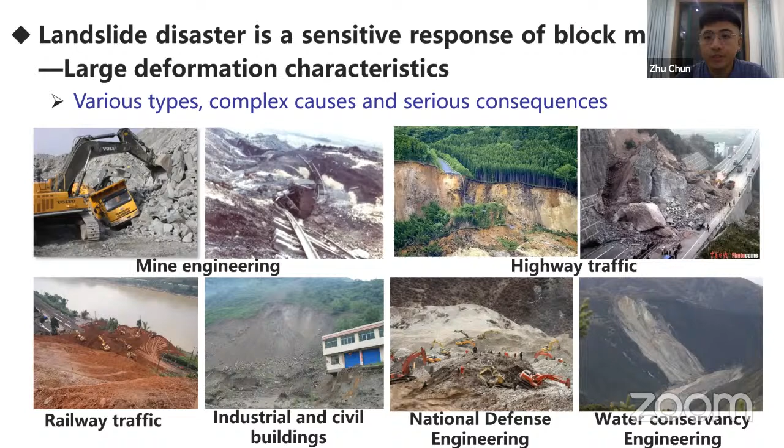In order to control landslide disasters, reinforcement methods such as lattice beams, anti-slide piles, and pre-stressed anchor cables were adopted in these projects, but many unfortunate landslides still occurred.

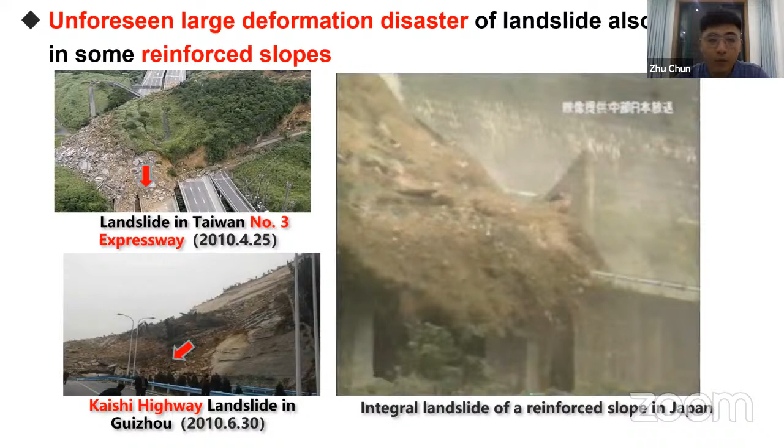According to the research, whether natural landslides or engineering-induced landslides, their essence is the same—they all experience a mechanical process in which geological bodies deform first and then undergo movement damage. We know the deformed body before a landslide can be described by Hooke's law, and the moving body can be described by Newton's second law. But how to describe the transformation from deformed body to moving body? This is a major scientific problem.

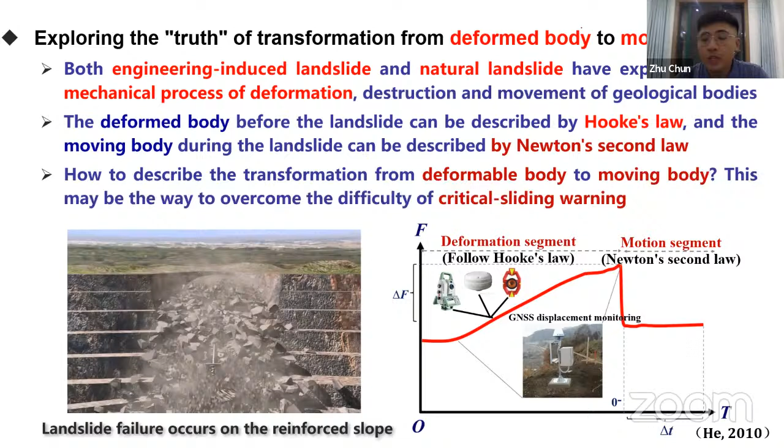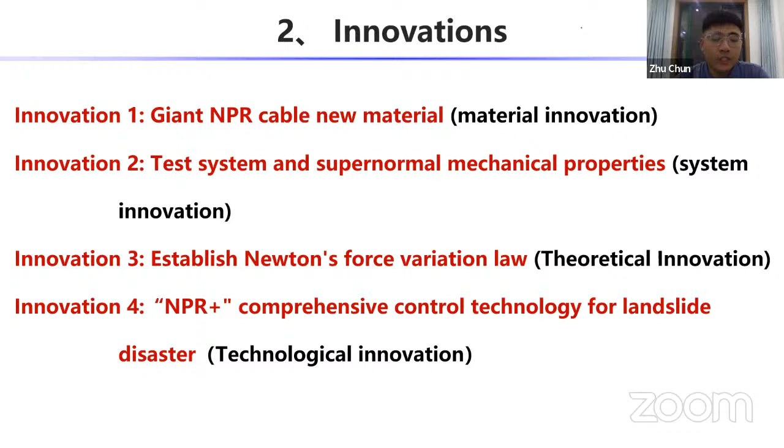Professor He believes this may be the way to overcome the difficulty of critical sliding warning. In order to solve the above scientific and technical problems, we have carried out extensive research, and the following four innovation points have been obtained.

Innovation 1, material innovation. A new material, the giant NPR (negative Poisson ratio) cable, is developed. Through the combination of conventional material and the NPR constant resistance device, the NPR effect of the material is realized. The material used in traditional slope reinforcement is generally damaged by large deformation, such as cable breaking and lattice beam shearing, which eventually leads to overall instability of the slope.

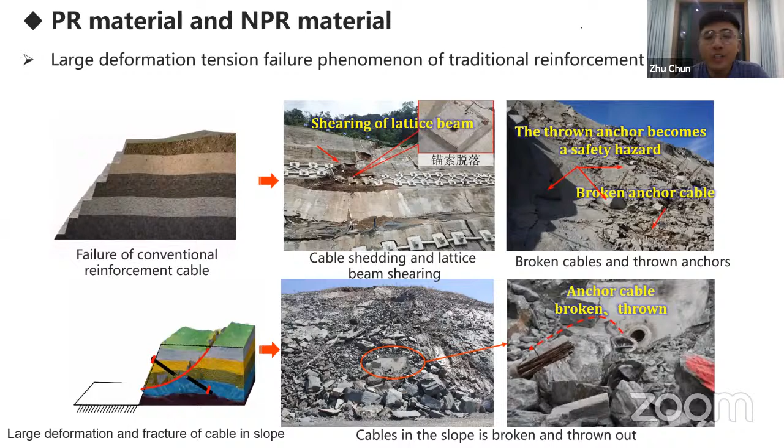The reason for this phenomenon is that the currently used reinforcement material is a small deformation material, which cannot bear large deformation and becomes locally necked and broken under tension—this is a kind of Poisson effect material. The solution is to develop a new material with constant resistance and large deformation, which has the mechanical property of thickening when stretched.

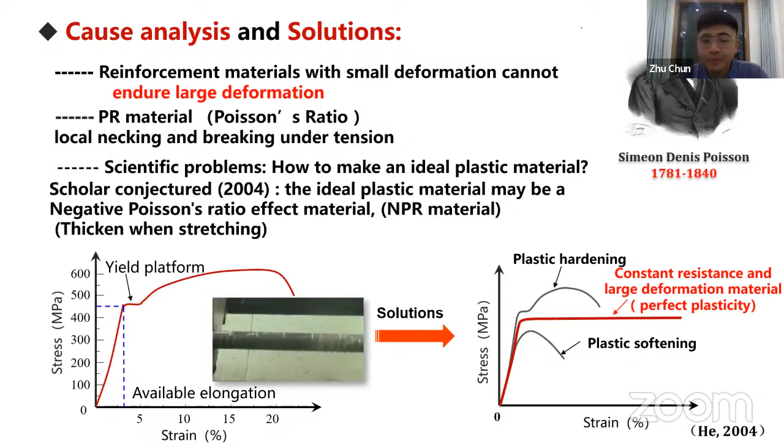Based on the concept of NPR structure proposed by Professor He in 2006, a new type of NPR structure was designed and developed, which can produce volume expansion when under tension. On this basis, the relevant mechanical models and constitutive relations are established.

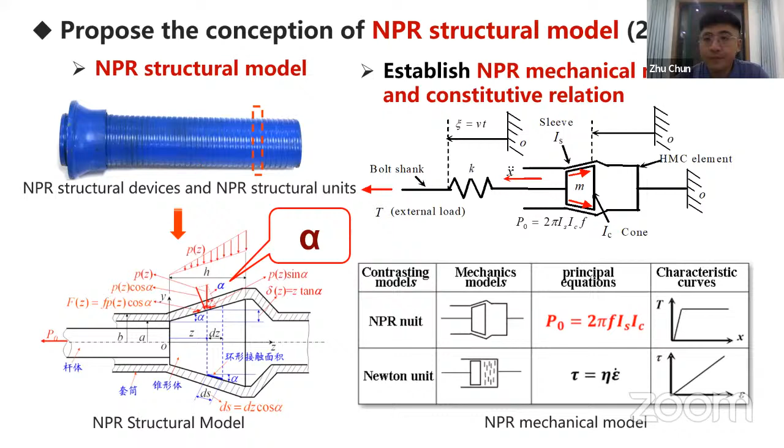The constant resistance design formula was deduced, and it was found that the constant resistance value of the NPR cable only depends on the elastic parameter of the constant resistance casing and the geometrical parameter of the constant resistance body, and does not depend on the external loading.

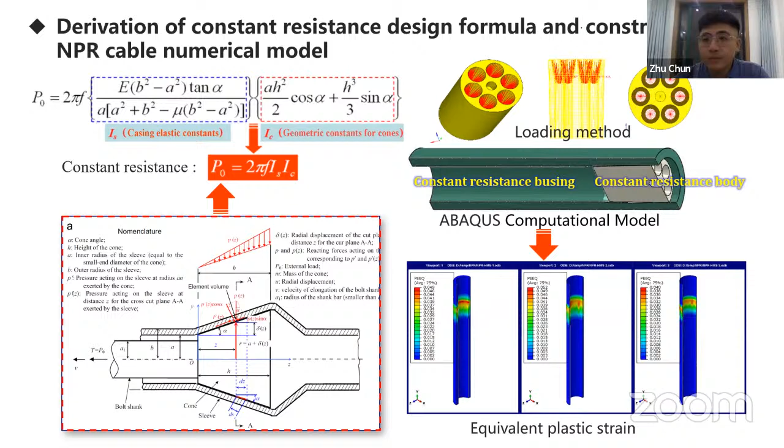The large deformation numerical calculation model and the mechanical analysis method of the NPR were constructed. The mechanical behaviors under static tension are explored in depth. In order to meet the needs of different landslide projects, a series of NPR cable products with different constant resistance specifications have been developed, suitable for small, medium, and large landslide engineering needs.

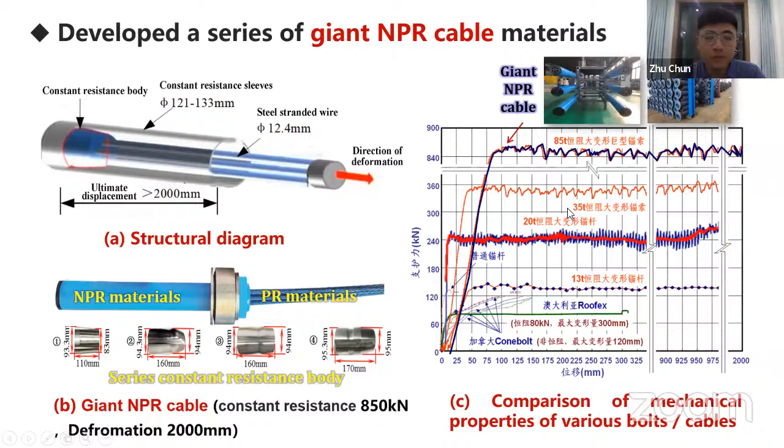Innovation 2, system innovation. The testing system and experiment method for the mechanical properties of the giant NPR cable were developed, through which the supernormal mechanical properties of the giant NPR cable material, with high constant resistance and large deformation, have been verified.

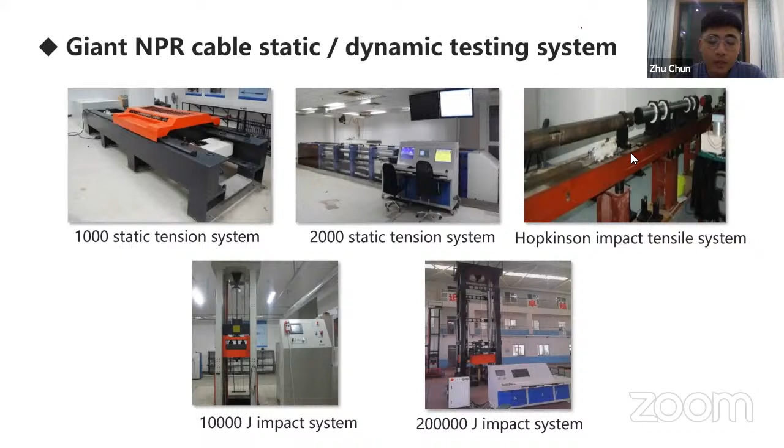In order to test the supernormal mechanical properties of the giant NPR cable, a series of mechanical test systems were invented, such as the 100-ton and 200-ton static tension test systems, the drop hammer impact test system, and the Hopkinson impact tension test system.

After testing, the new material of giant NPR cable shows four remarkable supernormal mechanical properties. The first is the NPR effect. Experiments have shown that the expansion of the giant NPR cable before and after tension can reach 3 to 4 millimeters, which has an obvious negative Poisson ratio effect.

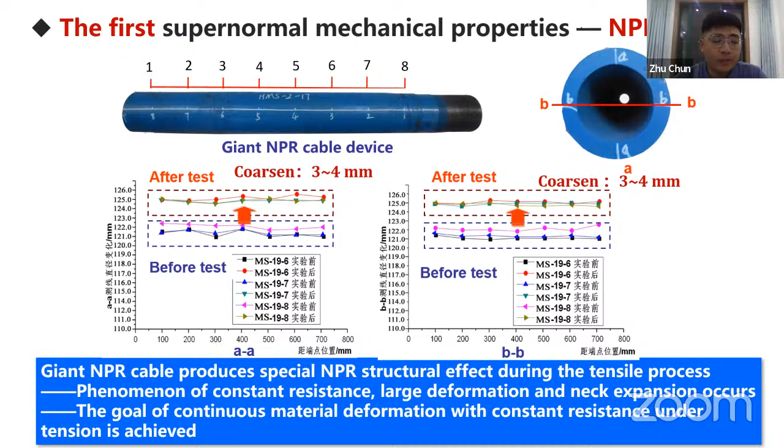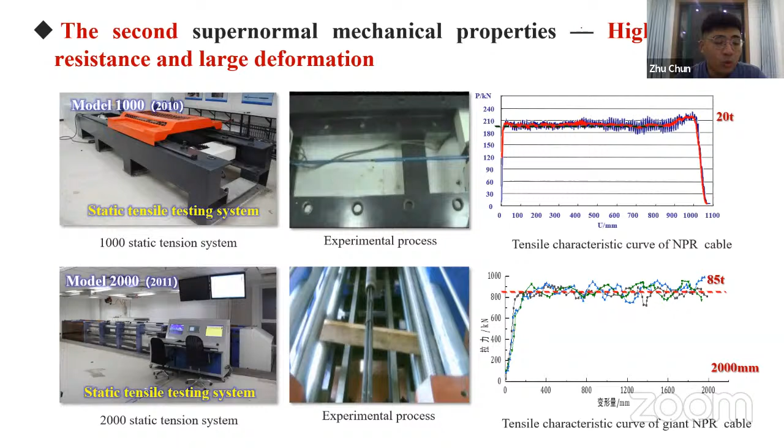The second supernormal mechanical property is high constant resistance and large deformation. After testing, the product has the mechanical properties of high constant resistance and meter-level large deformation. The constant resistance value is about 850 kilonewtons, and the maximum deformation can reach 2000 millimeters.

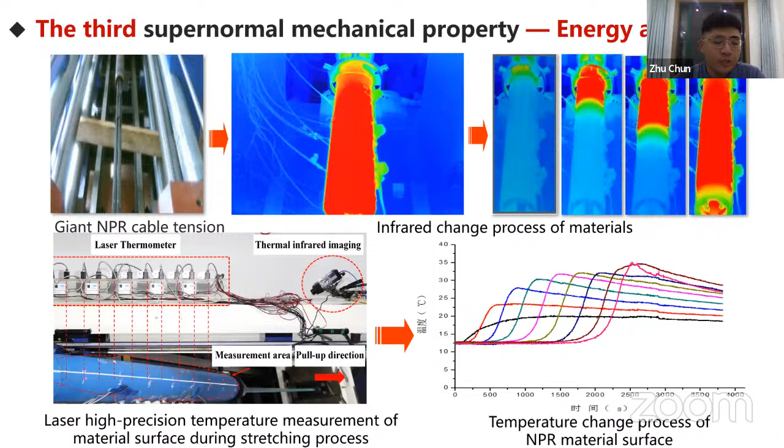The third supernormal mechanical property is energy absorption. Through infrared camera and laser temperature measurement equipment, the heating effect of the giant NPR cable during the static tension process was obtained, and its energy absorption mechanism was revealed.

The fourth supernormal mechanical property: under impact load, the giant NPR cable can bear multiple impacts without breaking.

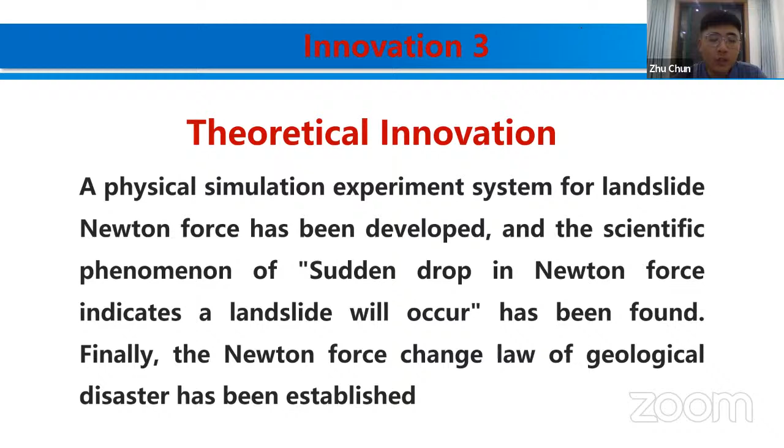Innovation 3, theoretical innovation. A physical simulation experiment system for landslide Newton force has been developed, and the scientific phenomenon of a sudden drop in Newton force indicating that a landslide will occur has been found. Finally, the Newton force change law of geological disaster has been established.

Before scientifically predicting landslides, we should further find the necessary and sufficient conditions for landslide occurrence. Since 1994, Professor He has led our group to research this issue, and a method for measuring the Newton force on the potential slide surface was proposed.

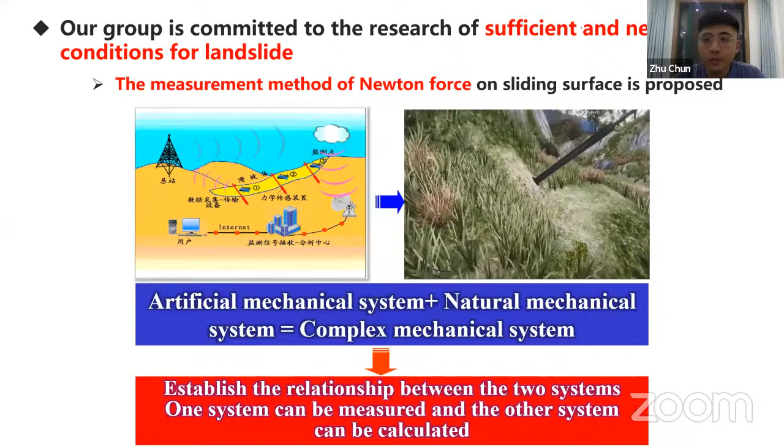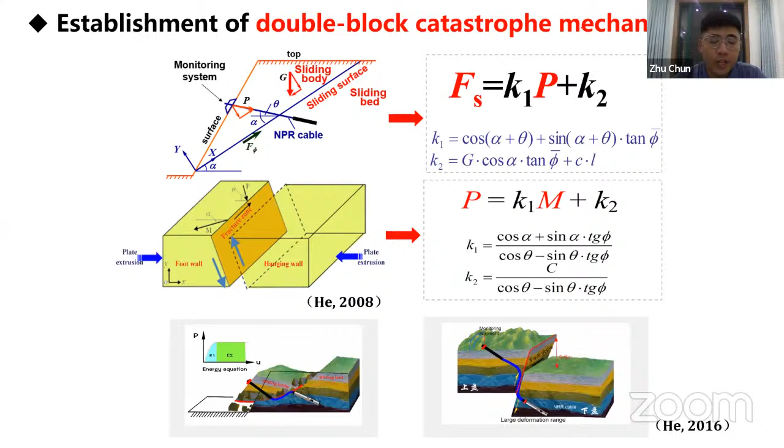Then the double block catastrophe mechanics model was established. The indoor physical simulation experiment system for monitoring Newton force is developed. Through massive experiments, the scientific phenomenon of a sudden drop in Newton force indicating that a landslide will occur is discovered, and it is verified in landslide similarity ratio physical model experiments.

Newton's force change law was established, which clarifies the rock mechanics interpretation during the transition from Hooke's deformation law to Newton's motion law, and reveals the core problem that the catastrophic time is proportional to the mass of the geological body and the catastrophe displacement, and inversely proportional to the Newton force.

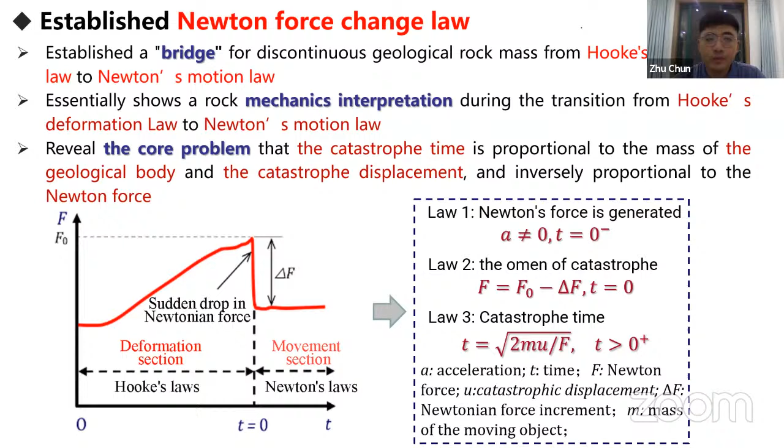Technological innovation: the integrated technology of landslide whole process monitoring and critical sliding early warning based on giant NPR cable has been developed, and the problem of integration of landslide large deformation disaster reinforcement monitoring and early warning has been solved.

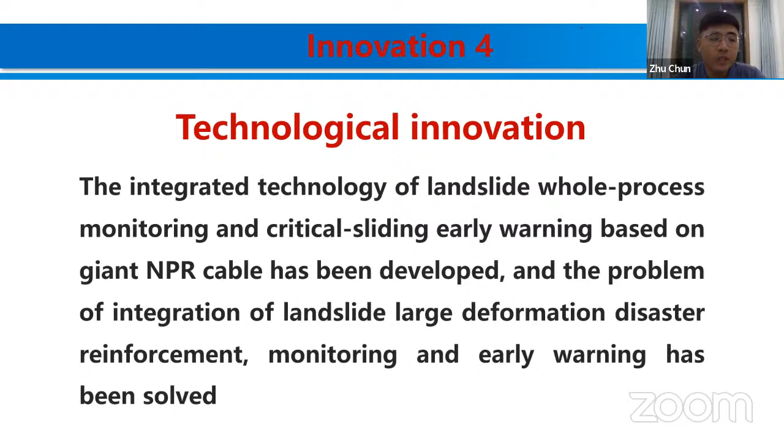Based on the above basis and the new NPR material, a Newton force monitoring and early warning hardware system for landslide disaster has been developed, including giant NPR cable force measurement system, intelligent sensor acquisition system, integrated protection system, solar power supply system, and

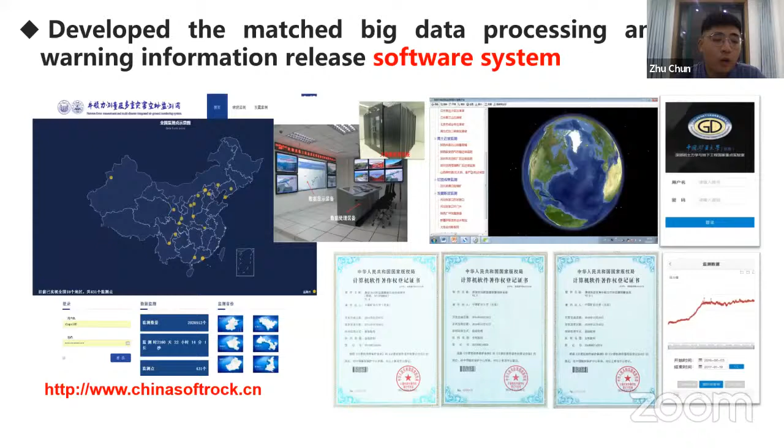big data transmission system. The matched software platform for big data processing and early warning information release has been developed, and the software copyright has been obtained.

The Newton force monitoring and early warning criteria and the model for landslide disaster have been established through the analysis of a large number of numerical simulations, physical model experiments, and field measured curves. Early warning modes of stability, potential instability, cracks, and slips are proposed according to the changing features of Newton force with time. Based on the above four modes, corresponding computer intelligent recognition criteria of blue early warning, yellow early warning, orange early warning, and red early warning are developed respectively.

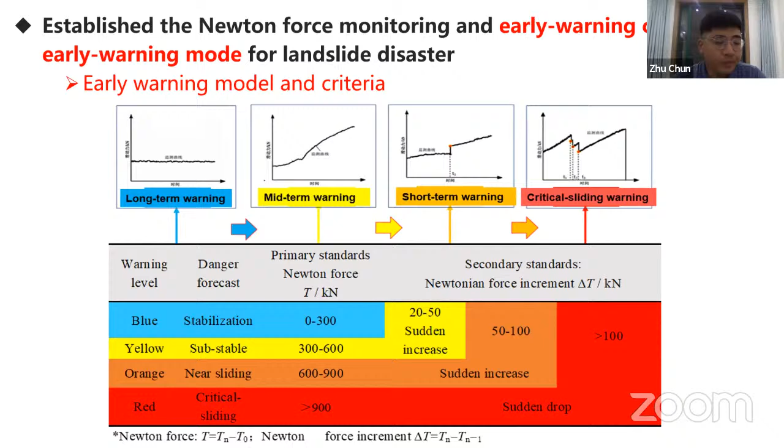By using the above equipment system, the phenomenon of sudden drop in Newton force indicating a landslide will occur was monitored on site 16 times, which verified the scientific validity of the Newton force change law.

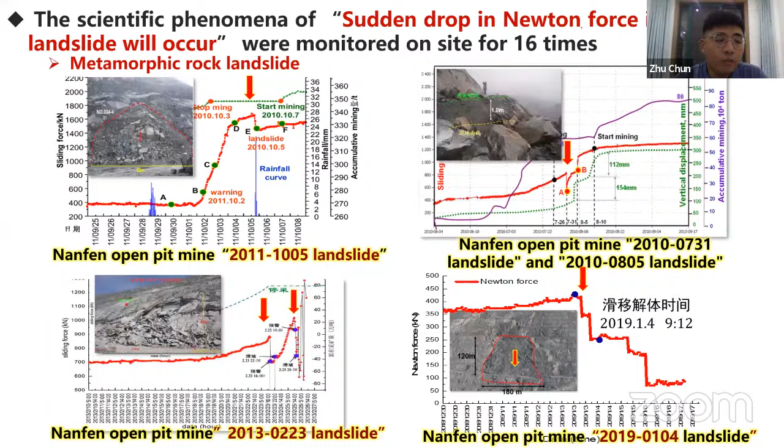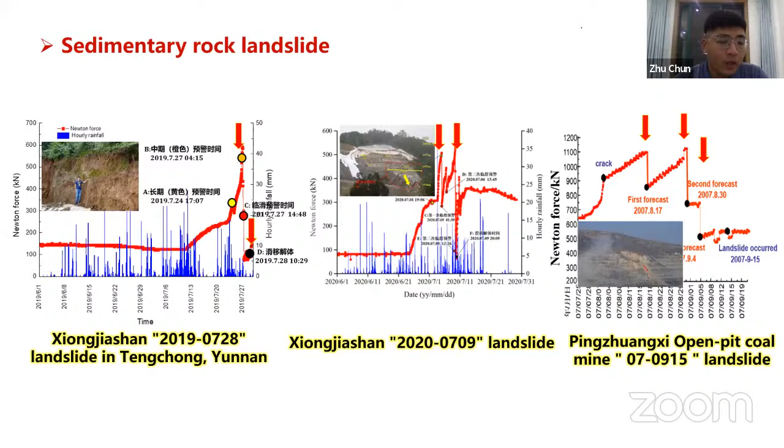Through analysis of the above cases, a total of 16 landslide disasters occurred in the past 10 years, and this system issued a critical sliding warning 3.5 to 20 hours in advance each time, effectively improving the precision and accuracy of critical sliding prediction for landslide disaster.

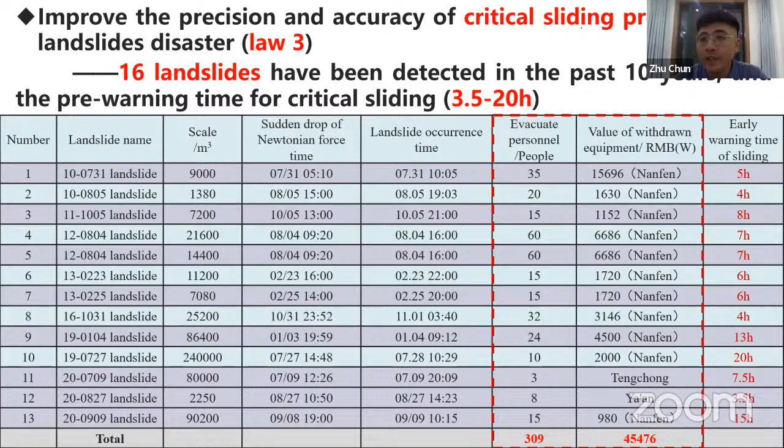Compared with other similar technologies in the world, it is found that the giant NPR cable material is superior to existing large deformation materials in various indicators, such as constant resistance value, deformation value, and energy absorption.

In terms of landslide disaster monitoring technology, the Newton force monitoring parameter, which is a sufficient and necessary condition for landslide occurrence, can be used. In addition to monitoring and early warning, it can also reinforce and protect the slope, and it can issue a critical sliding warning 3.5 to 20 hours in advance.

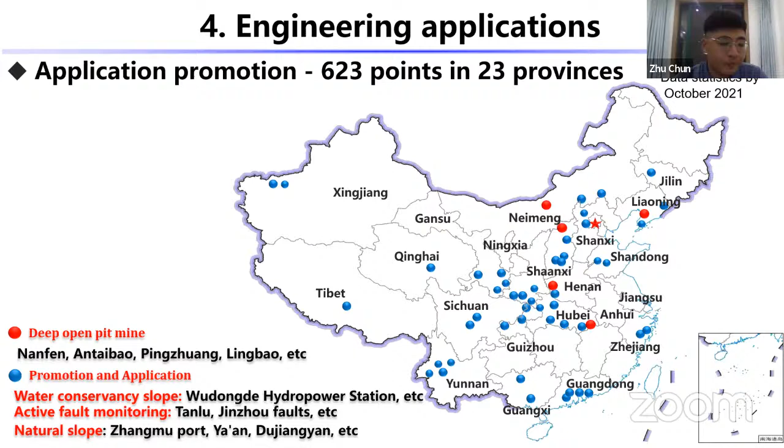At present, this technology has established 600 Newton force monitoring points in 23 provinces in China, involving 8 engineering application fields.

The following is a detailed description of the critical sliding warning process based on 3 recent application cases. The first one takes the Nanfen open pit iron mine as an example for analysis.

Since the Nanfen open pit iron mine applied this technology, the phenomenon of sudden drop in Newton force indicating a landslide will occur was monitored there 16 times.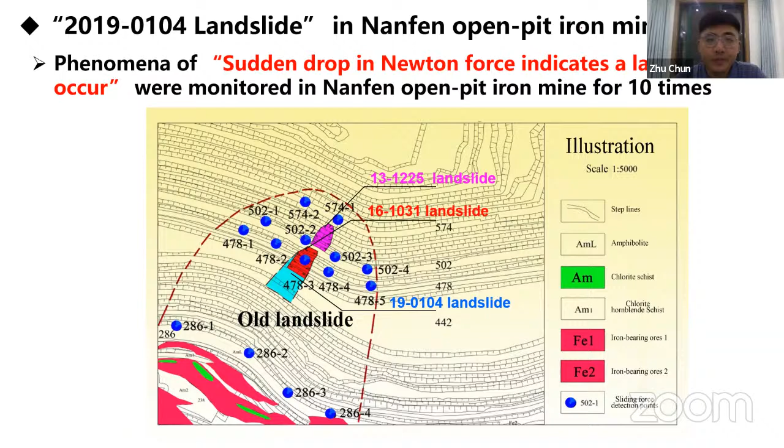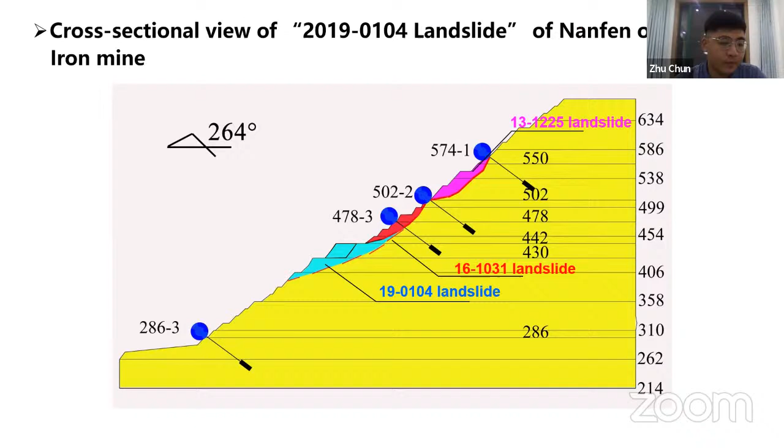This is the plane distribution feature of the landslide area on January 4, 2019. This is the monitoring point location and cross-sectional view of the 2019 landslide of Nanfen open pit iron mine, and this is the on-site aerial photo of the 2019 landslide.

Due to the disturbance caused by slope expansion and excavation, the original landslide accumulation continued to expand to the pit bottom, resulting in a new landslide.

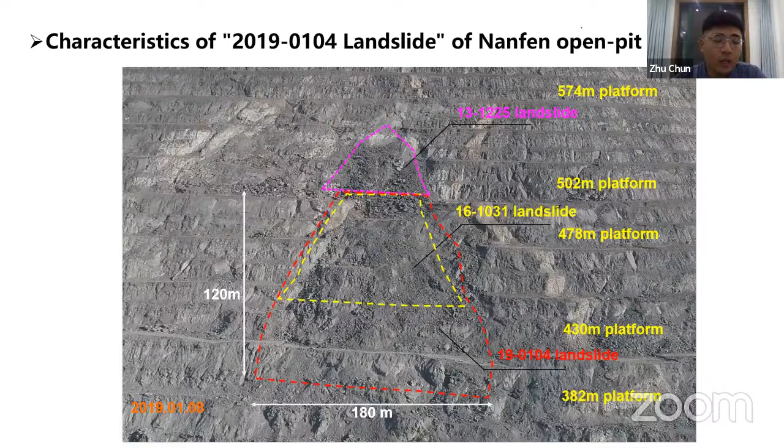At 19:59 on January 3rd, 2019, the monitoring curve suddenly dropped, and the system issued a critical sliding warning according to the early warning guidelines.

At 9:12 on January 4th, 2019, the landslide disintegrated and slipped, and the landslide occurred. The trailing edge of the landslide sank 7 to 8 meters, and the pre-slip warning time was advanced by 13 hours.

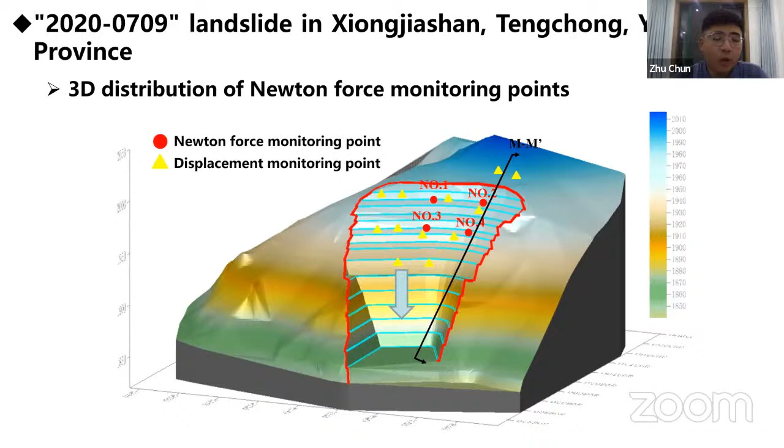With the influence of mining disturbance, cracks gradually developed on the slope, threatening the safety of quarrying machinery and workers. 4 Newton force monitoring points were installed in the quarry.

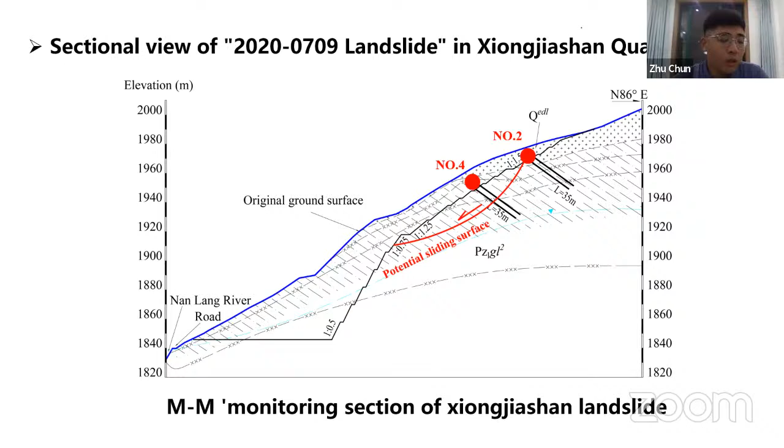Our system issued a mid-term warning at 19:06 on July 1st, 2020, and a short-term warning at 21:03 on July 4, 2020. Subsequently, at 1:39 on July 5th, 2020, the first critical sliding warning was issued, but the landslide did not occur. A second critical sliding warning was issued at 13:45 on July 6, 2020, and a third at 12:26 on July 9th, 2020. The landslide disintegrated and slipped at 20:09 on July 9th, 2020. The early warning time is 7.5 hours.

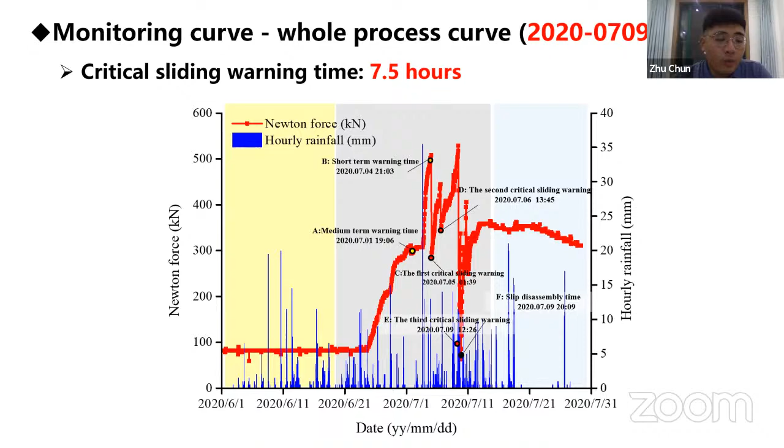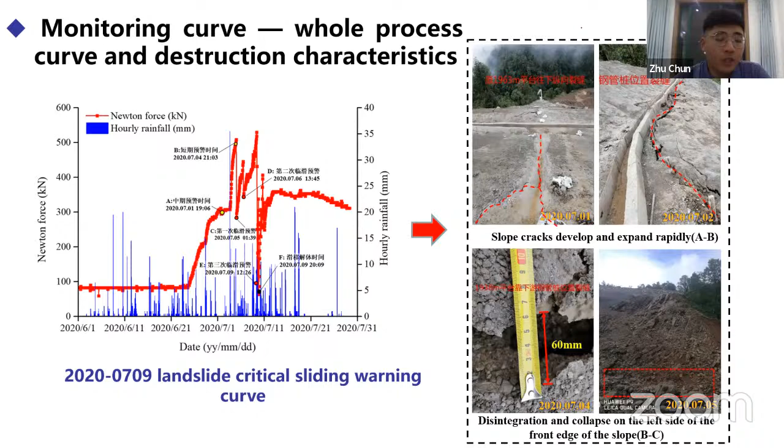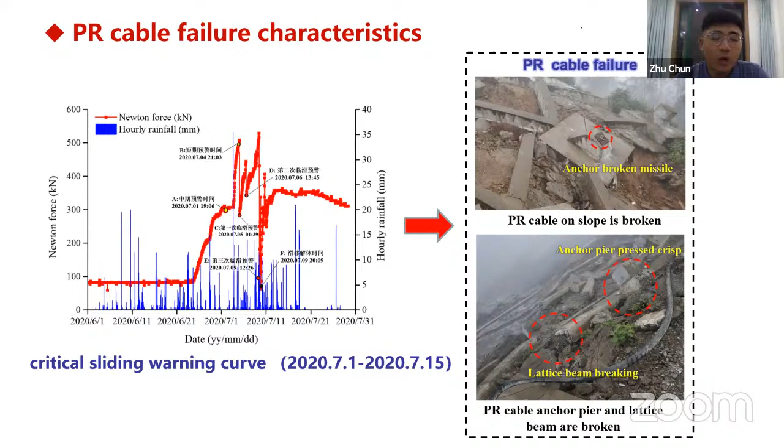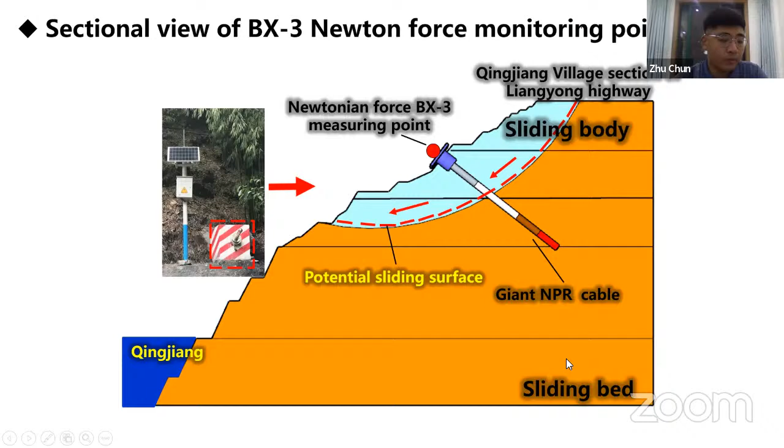For the third application case, take the landslide of Liangyong Highway in Sichuan province as an example. We have placed 5 Newton force monitoring points along the Liangyong Highway in Baoxing City. This is the layout section of the Newton force monitoring points. This landslide occurred near Baoxing number 3 and Baoxing number 4 monitoring points. This figure shows the Newton force monitoring curve.

According to the early warning criteria and mode, the system issued the medium and long-term early warning information at 18:48 on August 23, 2020, and the Newton force increased by 70 kilonewtons. At 10:50 on August 27, the monitoring curve suddenly dropped, and the system issued the critical sliding warning information. After 3.5 hours, the landslide occurred, resulting in the settlement and collapse of the highway around the landslide area, with a maximum settlement of about 40 centimeters.

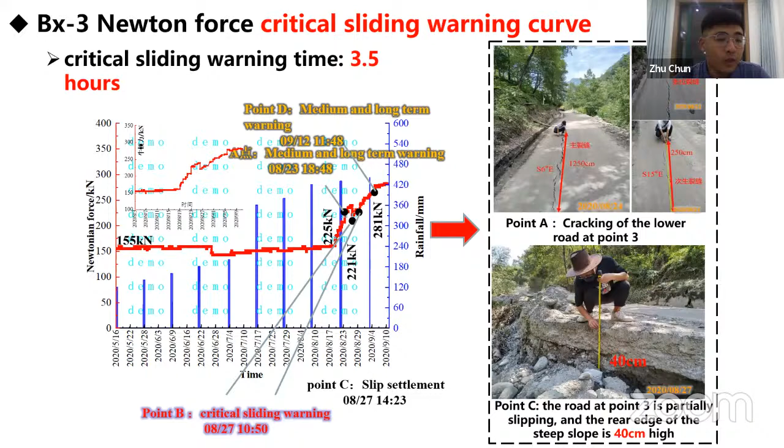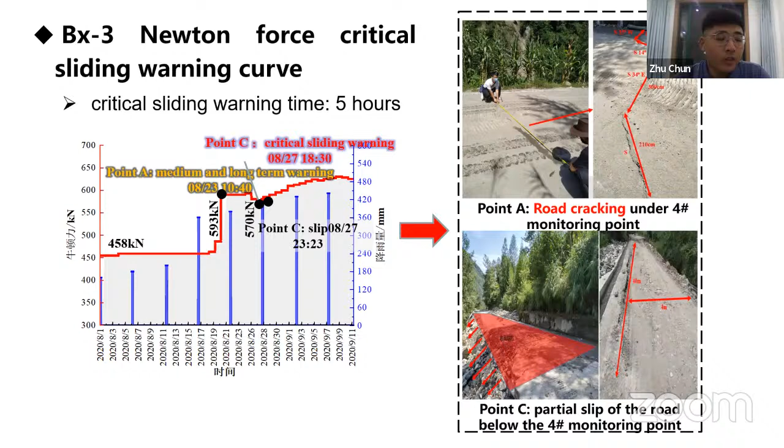This is the feature of cracking and slip failure of the slope near Baoxing number 3 monitoring point. This is the change curve of Newton force at Baoxing number 4 monitoring point, and the system issued a critical sliding warning information 5 hours in advance. This is the feature of cracking and slip failure of the slope near Baoxing number 4 monitoring point.

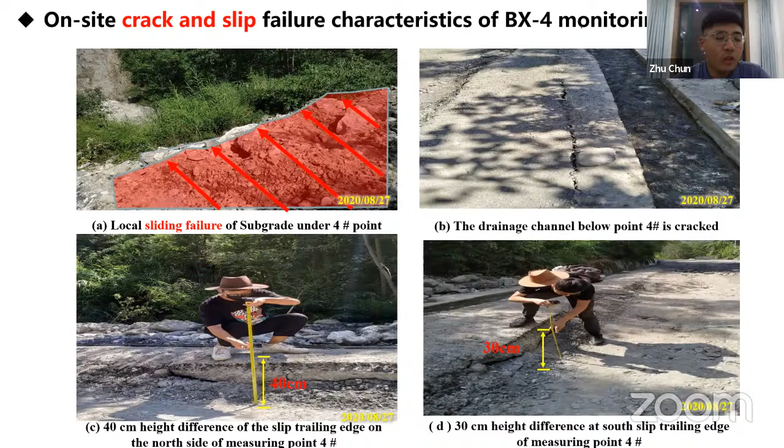This is the end of the analysis of the application cases. The above is my presentation. Thanks for your listening.

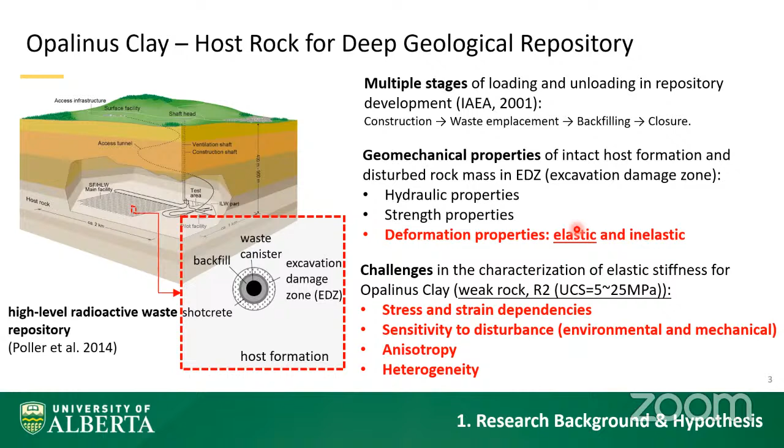In this study, I will mainly focus on the elastic deformation property. Of course, there are challenges in the characterization of elastic stiffness for this type of weak rock, including its stress and strain dependencies, its sensitivity to disturbance, its anisotropy, and also its heterogeneity.

So the determination of rock mechanics properties mainly relies on laboratory testing on specimens at a centimeter scale. The specimen at this size may not represent the Opalinus clay at a larger scale, where strong heterogeneity and fractures can be present. Also, the lab specimen extracted from the rock cores can be heavily disturbed due to coring and the specimen preparation process, and this disturbance is particularly evident in weak shales. Although there are some recent improvements to minimize this disturbance, it is still necessary to assess the lab properties with testing results from other testing methods, for example from in-situ testing.

However, we know these are two different types of tests, conducted under different loading conditions. And like the lab test, the rock for in-situ testing may also suffer from a certain degree of disturbance by drilling. So these are the challenges I had to face to compare the laboratory and in-situ properties for Opalinus clay.

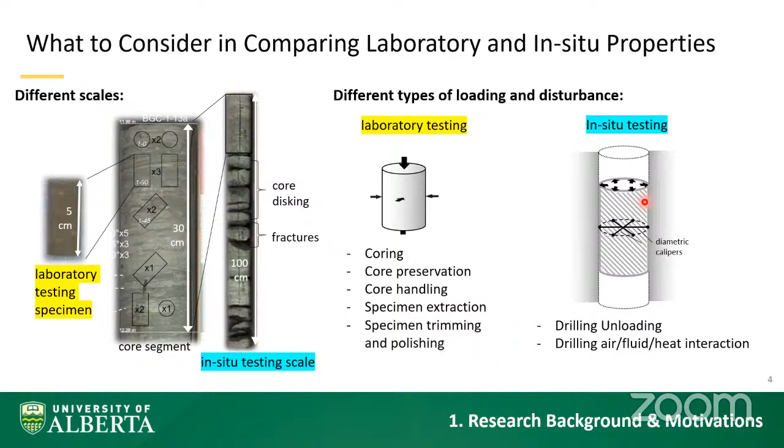In fact, the monotonic loading on the rock specimen induces inelastic deformation due to microfracture closure and sliding, and the modulus obtained from this loading slope does not represent the true elastic behavior. Instead, it was demonstrated both from theories and from experiments that unloading from a current stress level can sufficiently inhibit the frictional behavior, and the modulus determined using this unloading step can better represent the elastic properties of the weak rock. So for this reason, only the unloading modulus is considered in this work.

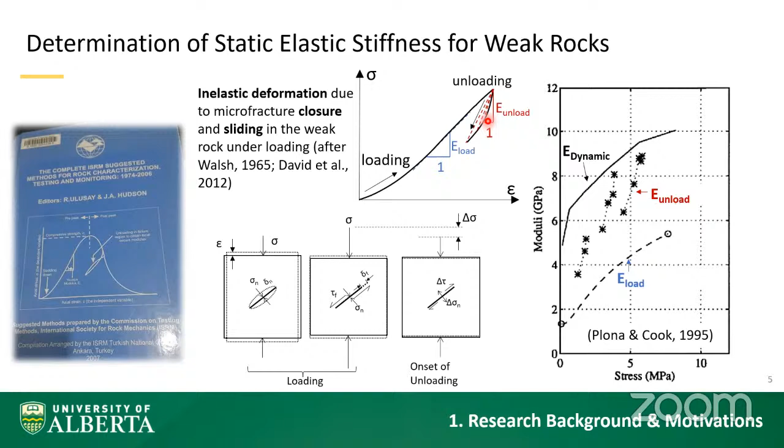For in-situ rock modulus measurement, there are established methods, including pressuremeter testing, usually called a dilatometer in the rock mechanics community. For a monotonic pressuremeter test, the probe is deployed in a borehole, and then compressed air or fluid is injected into the pressure probe, allowing the borehole to expand under a controlled pressure increase. For a Cambridge-type pressuremeter, the radial deformation of the borehole is monitored by a set of caliper arms sitting in the middle plane of the probe. The radial deformation captured by different caliper arms can differ at different axes, and typically the averaged response is used for interpretation based on the cavity expansion theory.

Again, for testing in weak rocks, the modulus obtained from this unloading step is considered more representative of the elastic properties.

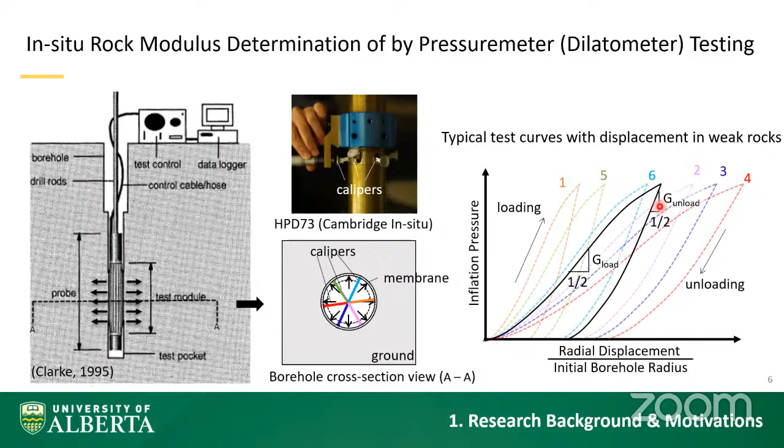This study is mainly established on a recent field campaign at Mont Terri Rock Laboratory in Switzerland. In this underground research laboratory, we have three test boreholes: borehole BGC-2 and borehole BGC-A4, both drilled perpendicular to bedding, and borehole BGC-A6, drilled parallel to bedding. All the test boreholes were drilled using air flush, with geological and geophysical logging after drilling. Pressuremeter tests were conducted at different locations of each borehole, and we also selected some rock cores preserved for rock mechanics testing later in the lab.

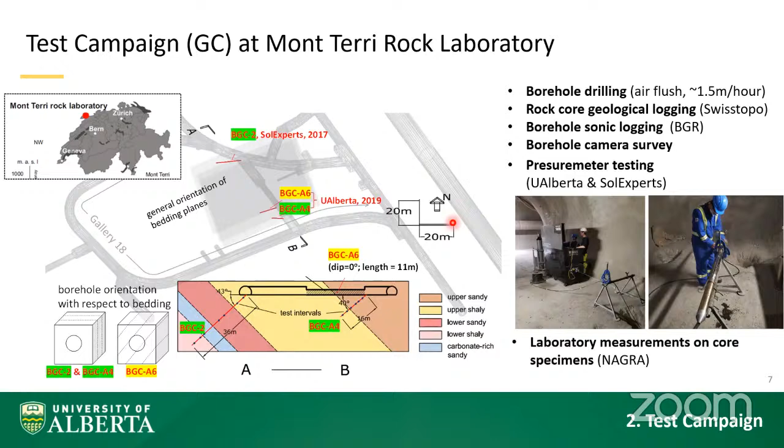Let's look at the lab test first. From the rock cores, specimens were cut with different orientations for triaxial tests to evaluate the impact of rock anisotropy. In each test, the rock specimen was initially loaded to a certain effective confining stress before triaxial loading. During triaxial loading, unload-reload cycles were performed at the early pre-peak stage and also at the post-peak stage. The Young's modulus was determined using linear regression on the unload data, and nonlinear deformation is also observed during this unloading step, where a variation of the secant modulus can be derived over this small unloading strain.

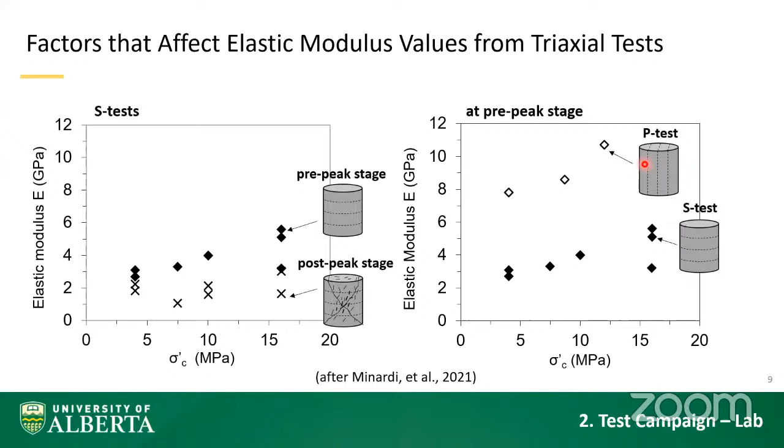This slide shows the summary from the lab tests. It shows that at the post-peak stage, the elastic modulus of the rock is reduced because of shear-induced damage. The second plot shows the impact of rock anisotropy: the modulus obtained for the specimen loaded parallel to bedding is about 2 or 3 times higher than that for the specimen loaded normal to bedding.

Let's also look at the pressuremeter test. For the pressuremeter test in stiff ground, one important step is to calibrate system compliance. This is done by conducting an inflation test in a steel thick-walled cylinder. The deformation of the system at different pressure levels can be calibrated and then used to correct the field test data.

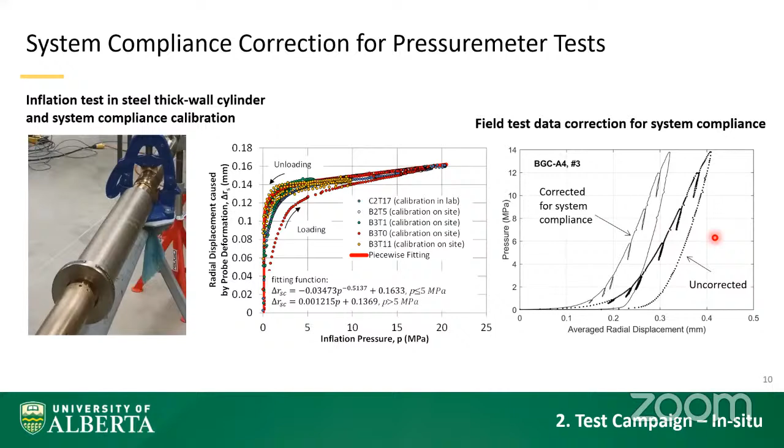Ideally, in the pressuremeter test, the material point near the borehole is subjected to plane strain shearing, with changes of shear stress and shear strain at the same time. Therefore, we can use the relationship between the expansion pressure and cavity strain to determine the shear modulus of the rock. In our test, we performed multiple small unloading steps at different pressure levels, and the shear modulus can be evaluated either using a linear fit on the unloaded data or a power law fit to describe the nonlinear elastic deformation over the unloading shear strain. This second approach allows us to determine the variation of the secant shear modulus with unloading strain increment.

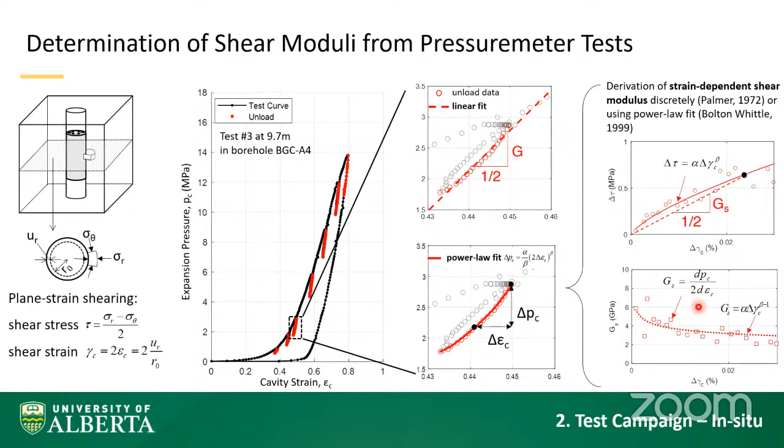This summary plot shows the shear modulus determined using all the unloading steps in different tests from these two boreholes. It shows the increase of the modulus with expansion pressure for the first 5 MPa, and the modulus becomes more or less constant after 5 MPa. The comparison between the results from these two boreholes also shows the strong effect of rock anisotropy on the determined shear modulus values.

We can also observe the variation of shear modulus with borehole depth in each borehole, which shows the degradation effect of rock mass disturbance in the excavation damage zone, and also the effects of local fractures in a testing interval that can reduce the modulus value.

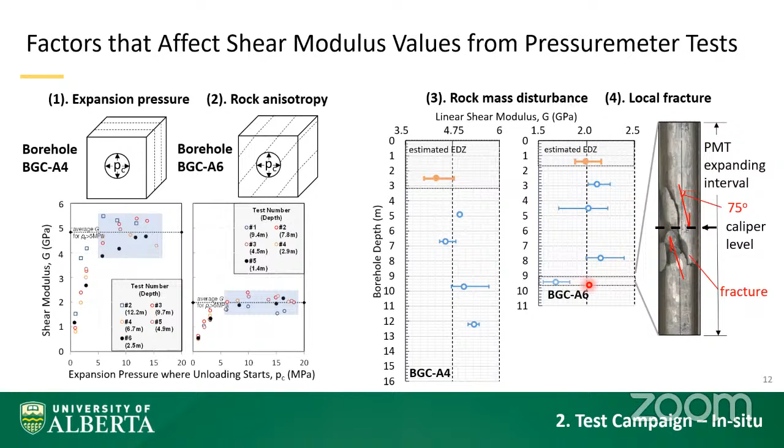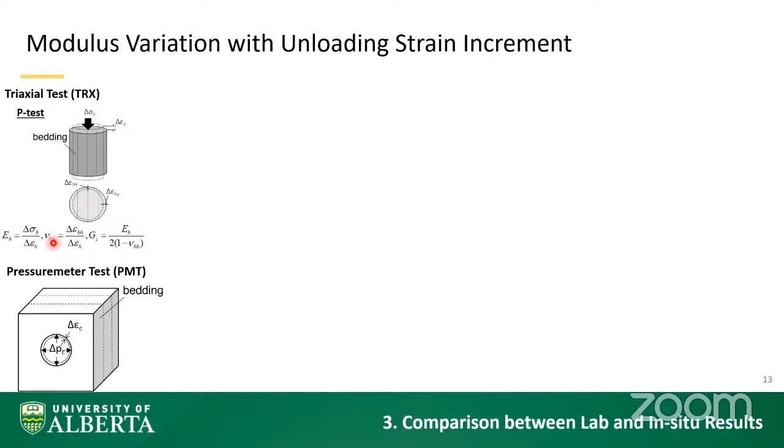So the big question is, how are the triaxial test results compared with the pressuremeter test results? We'll only consider the cases with loading parallel to bedding for both tests. For the laboratory test, we can calculate the shear modulus using the measured Young's modulus and Poisson's ratio for the same orientation, and then compare the shear modulus obtained from the pressuremeter tests.

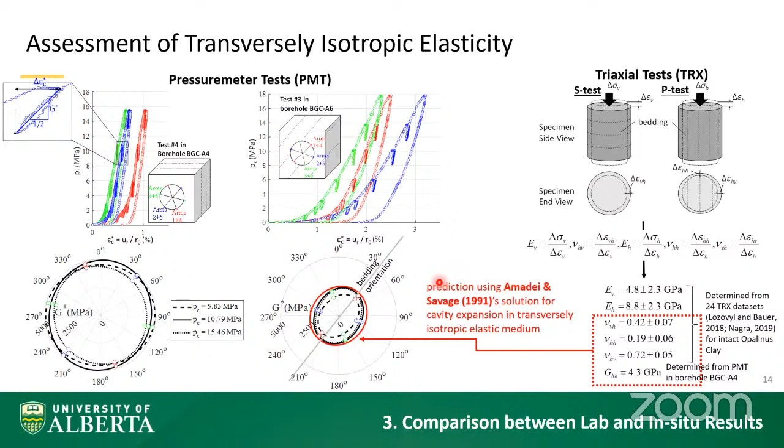To explain this anisotropy, I considered the Opalinus clay as a transversely isotropic elastic material and calibrated those elastic parameters using both triaxial S tests and triaxial P tests on intact specimens. These parameter values were then used in an analytical solution derived by Amadei and Savage for cavity expansion in the borehole with this particular orientation in a transversely isotropic elastic medium. The prediction shows reasonable agreement in orientation with the field data, but slightly overestimates the magnitude. This overestimation will be explained in the next slide.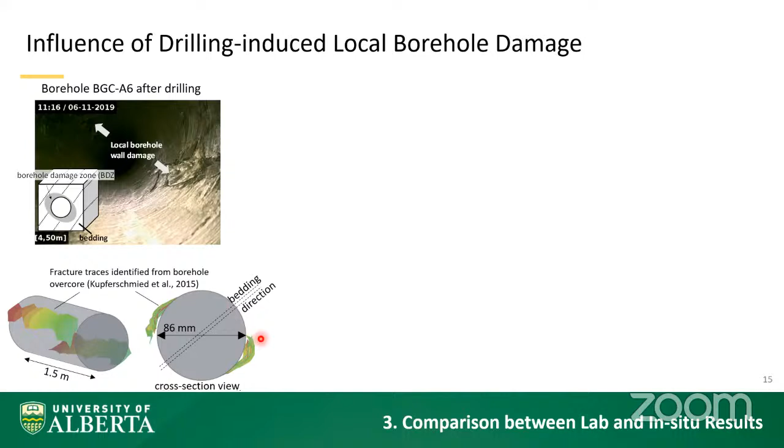To understand how this would affect the pressuremeter test, I built a simplified finite element model for a quarter borehole, and the background medium is defined using the laboratory calibrated transversely isotropic elastic parameters. In addition, an elliptical stiffness degradation zone is imposed to mimic local borehole damage. The modulus G star can then be estimated using the predicted borehole deformation at different azimuths theta. It shows better agreement with the pressuremeter measurement when this local borehole damage is considered.

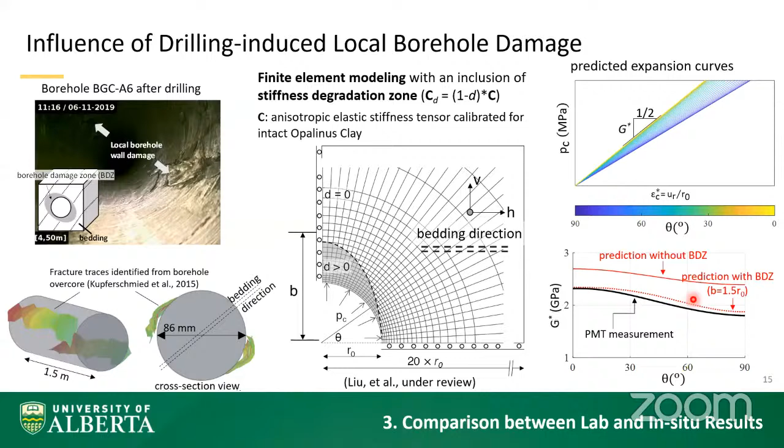For this test, I explicitly modeled the stress dependency of the elastic stiffness tensor for Opalinus clay, assuming its variation as a function of the three principal stresses. The expression for Young's modulus is reduced to be a function of the axial stress for triaxial loading. A scalar damage variable is also introduced here to account for the modulus degradation at the post-peak stage.

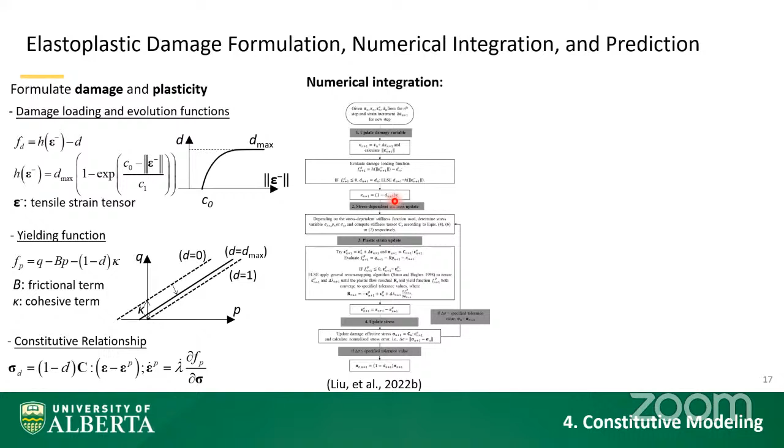To complete this constitutive model, the damage function based on the tensile strain tensor and the yielding function based on the stress are also formulated. All of these formulations can be integrated into this workflow to solve for the stress change given a strain increment, and the details of this workflow can be referred to another paper we recently published. A total of 8 model parameters are then calibrated, and the prediction for the multi-stage triaxial test shows good agreement with the test data.

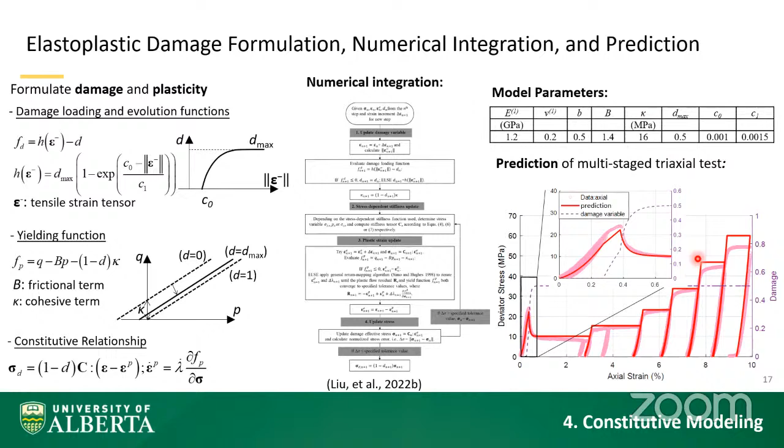This constitutive model is further implemented into a finite element code to predict borehole deformation during loading and unloading. For a simple demonstration, an axisymmetric borehole model is considered for the case with isotropic in-situ stress. The use of stress-dependent stiffness functions predicts nonlinear elastic deformation. Since the current model cannot reproduce the hysteresis of unload cycles, I use the tangent line on the predicted curve to estimate the pressuremeter shear modulus.

This prediction is further extended to the case where extensile microfractures can be induced by drilling unloading. At the first stage of modeling, after the release of the pressure Pc, a near-borehole damage zone with a degraded modulus is predicted. At the second stage, the pressure is reapplied to the borehole wall to mimic pressuremeter loading, and the recovery of the elastic modulus is predicted.

The change of pressuremeter shear modulus was then estimated from the expansion curve. When the pressure is recovered to the in-situ stress level, it shows a lower magnitude than the case without borehole damage. In a parametric study, I also showed a case with a higher maximum damage limit, and it predicts a larger extent of borehole damage zone and causes more reduction of pressuremeter shear modulus.

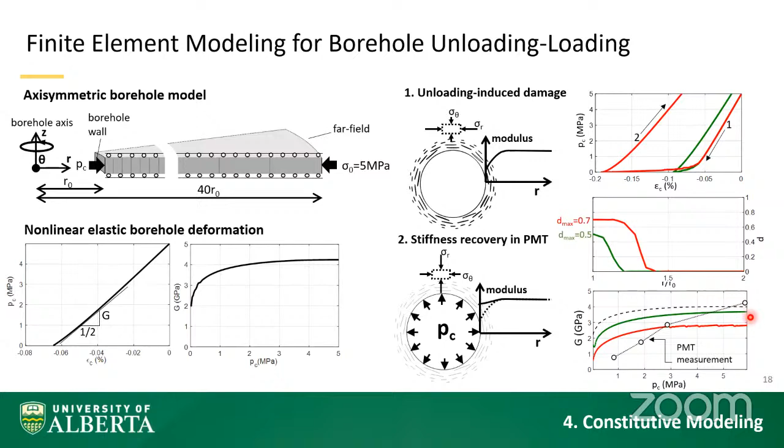This concludes my presentation, and I'd like to summarize. In this study, the elastic stiffness was determined using unloading steps from high-quality laboratory and in-situ measurements. Despite different scales, agreement between these two types of tests was established for the Opalinus clay when all these factors are considered. An elasto-plastic damage model incorporating the stress-dependent elastic stiffness was proposed and implemented in a finite element code. It effectively quantified the modulus evolution from both triaxial tests and in-situ pressuremeter tests.

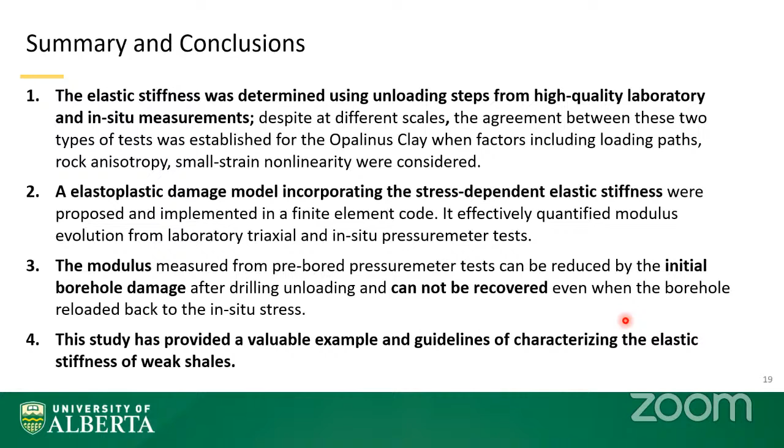The modulus measured from pressuremeter tests can be reduced by initial borehole damage after drilling unloading, and it cannot be recovered even when the borehole is reloaded back to the in-situ stress level. I think this is the most important finding. This study has provided a valuable example and guidelines for characterizing the elastic stiffness of weak shales. It gives us tremendous confidence using our current procedure to characterize and model the modulus for this type of rock.

I'd like to just highlight the references I used in this presentation.

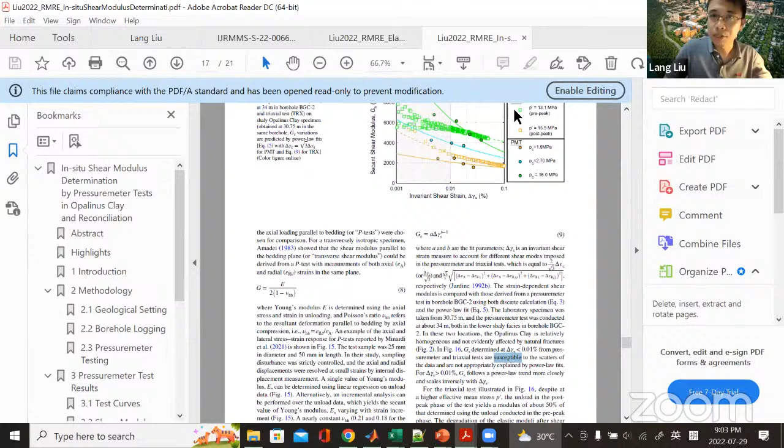I can share my screen. You have figures in your slide? Yeah, we can still see your slide. If you have figures now, you can see my screen, right? Can you see my screen now? Yes, yeah.

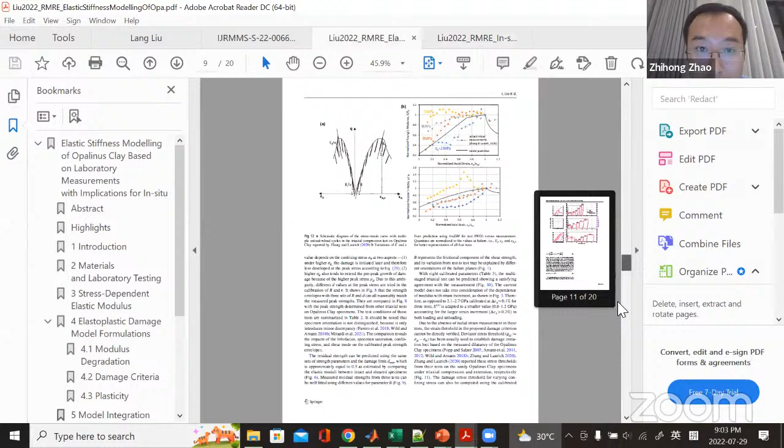So we have what we call a multi-channel ultrasonic probe. It sends the wave from the emitter, and the wave can be received by different receivers behind this emitter. Then you can determine the wave velocities for each ray. This gives you data that you can use for tomographic inversion analysis to determine the radial and longitudinal variation of the velocity. This can certainly give you some sense of how the velocity or modulus changes from the borehole wall to the far field, giving you estimates of the borehole damage zone.

That's just one way to do that. However, there are some limitations with this method too, because we know the Opalinus clay is strongly affected by moisture and saturation. So what you measure here might not directly represent the degradation of the modulus, but possibly just represent the variation of saturation. So we need to do a careful evaluation to decouple those two effects in order to identify the real BDZ.

Hopefully I answered this question. Yeah, thank you. I think we have two more questions in the chat box.

Yes, the second one is about... thank you for your presentation. After post-peak, the rock is no longer an elastic material. How can you measure its elastic modulus? Yeah, that's also a good question.

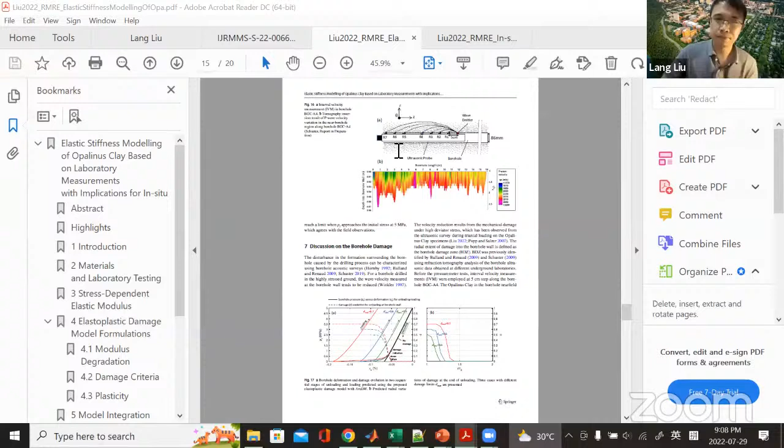Yes, thank you. Do we have more questions from the audience? Yes, I would like to ask two more general questions.

One is about scale effects. I think your work is quite interesting. You have lab tests and also in-situ data. For rock mechanics, we always know the scale effect is quite difficult to consider in the model. You have this data, and I don't know if in your model you have some idea to consider scale effects. And the other question is about nuclear waste repository.

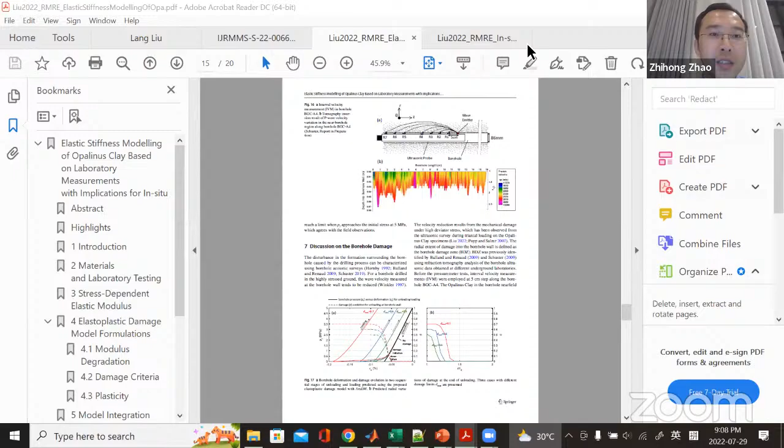We know that in addition to in-situ stress, it may also suffer from high temperature and, like you said, moisture or something. I think coupled processes is also an important issue, so what's your opinion on extending your model in the future to consider these coupled processes? Thank you very much.

Yeah, thank you a lot, Dr. Zhao, for these great questions. So the first one, scale effect.

In this investigation, we compare the specimen at the centimeter scale with the pressuremeter testing at about meter scale. Definitely for the interval of pressuremeter testing at that scale, we have heterogeneity of the lithofacies because Opalinus clay is very heterogeneous. For example, when we're doing a test in the sandy facies of Opalinus clay, there's a strong variation of the mineralogy even within this 1 meter.

So definitely there's a scale effect, because in laboratory testing you're always testing a small specimen that only represents a certain lithofacies.

But in this study, we didn't really see the scale effect. Like I just presented, we're comparing the two types of tests in the same borehole, and we can see the agreement between the lab test and the pressuremeter test are pretty good. This means for the centimeter scale to the meter scale, there might not be a strong scale effect. Maybe if you go smaller, to the millimeter scale or micron scale, that will show a strong scale effect, because now you're investigating the grain compared to the big specimen.